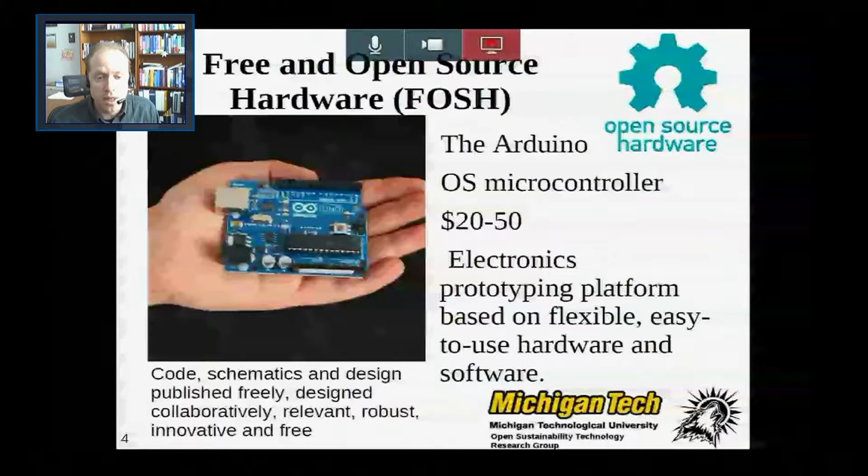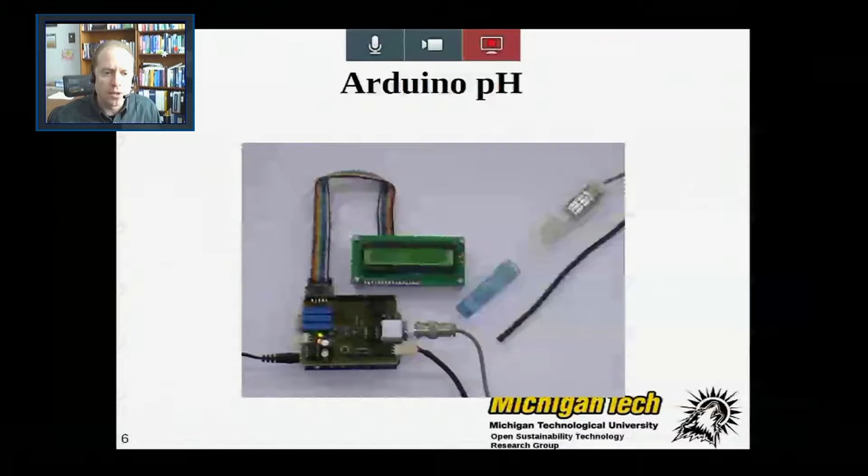Now, there's hundreds and hundreds of automation projects that have been developed using the open source Arduino. But of all of them, the one that's the most interesting, at least for me, is open source 3D printing, or the RepRap. So RepRap stands for Self-Replicating Rapid Prototyper. It is a 3D printer. It extrudes plastic filament by heating it up, going over a surface in 2 dimensions, just like a normal printer.

And by doing this, it can build up 3-dimensional objects. It can also build the components that make itself up. So the picture on the left is the first generation RepRap, and on the right is 2 of my students demonstrating its use with the One Laptop per Child computer developed by MIT.

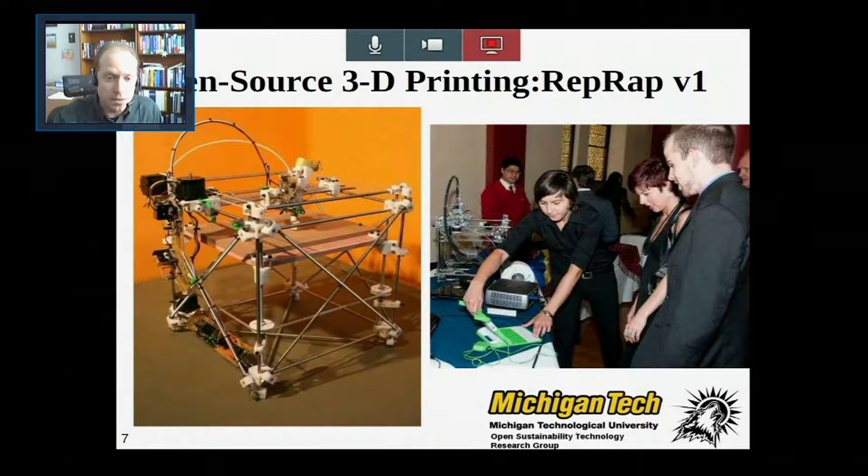Because the RepRap, these open source 3D printers, are open source, people from all over the world, including Brennan, one of my students here, are improving it. They're building on the design, making it better. This version 2 of the RepRap uses less parts, it's easier to put together, and costs less money.

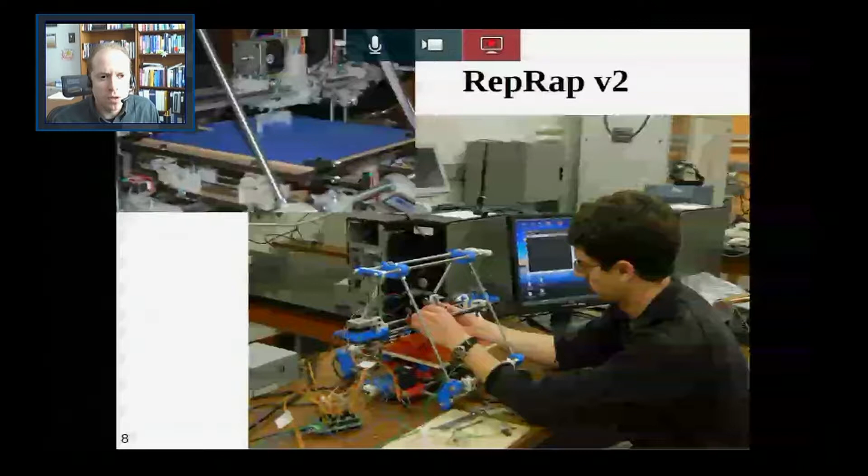Then here's version 3, and this gets to how you can start to use this open source approach to make very valuable scientific equipment. In this picture, you see an OpenSCAD model for an automated filter wheel. An automated filter wheel simply turns and puts a filter in the path of a light, and I use it for my solar photovoltaic research to test how solar cells do with different colors of light.

These filter systems are very expensive. The commercial ones are over $2,500, and the one that I had broke, so I needed a new one. But rather than go buy one, which was pretty expensive, we designed one using OpenSCAD, which is an open source CAD package that's freely available for everybody.

The computer it's running on is an old computer that was thrown out, but we revitalized it with a version of Linux, which is much faster. It's a much better operating system than, say, a Windows type machine. And then we used the 3D printer to print out our filter wheel.

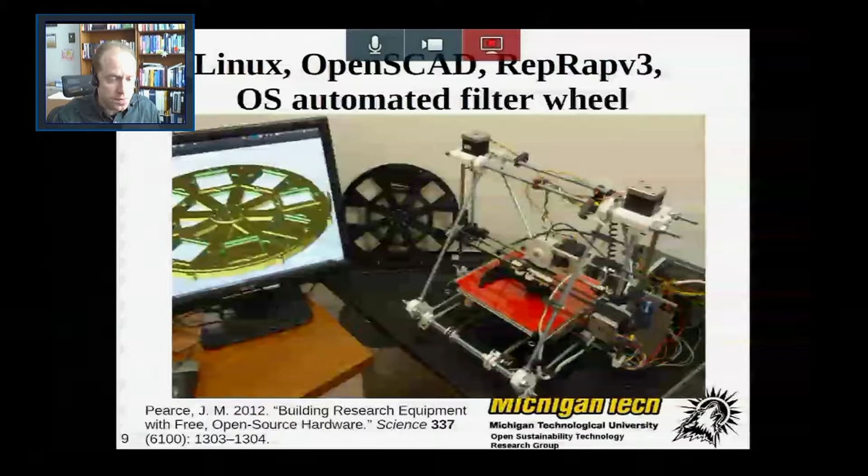So we were able to have an automated filter wheel that was exactly what I wanted for our lab, superior to anything on the market, for $50 instead of $2,500. And we continue to do better.

So now we've pushed the price of the RepRaps down to under $600. This particular version can be built in under 24 hours. If you have 2 people, it can be done in 5.

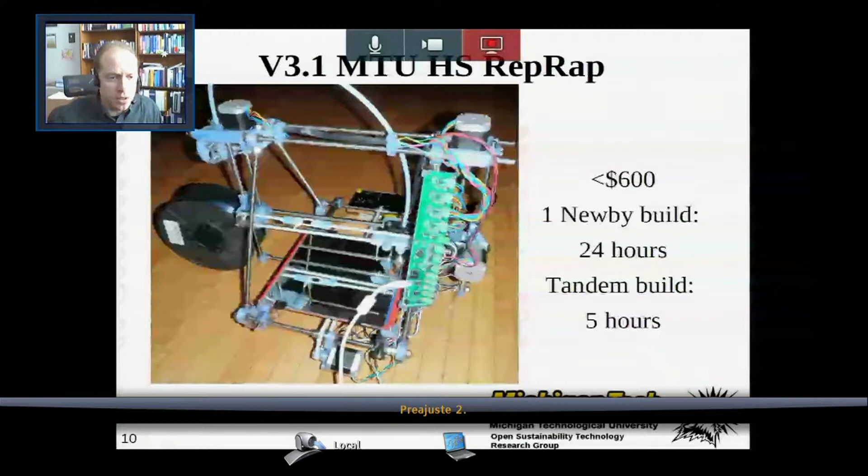Then you use this printer to develop very high-end scientific equipment. And when you do that, you can make an open source lab. So I want to go through some examples of how scientists can use this open source philosophy to drive down their research costs.

Because she shared her innovation with the world, she's repaid by the people that come after her developing her technology even better. So now she can download both the test tube rack and the centrifuge and print them for a fraction of what it would cost to buy them on the open market. It's in everyone's best interest to share as much as they can, because the more people that build on their design, the better it will be for scientists down the road.

And it goes for other applications. Oftentimes, one of the most expensive things a scientist does is prototyping. We were working on a polymer-based heat exchanger, and nobody even in the US could do it. We had to send away to Germany to have them do the laser welding prototyping for us, and this got very expensive. They were charging us $300 per item.

We wanted to test a bunch of them, and it was becoming prohibitively expensive. So what we did is we found an open source design for a laser cutter and adapted it for our own needs. If you look in the upper right-hand corner, all of the black components we designed and printed to meet our application exactly. We were able to create a polymer heat exchanger prototyping system, a laser welding system, for less than it would have cost to do 3 or 4 experiments overseas, and now we can make hundreds of them. This one device has saved my labs tens of thousands of dollars already.

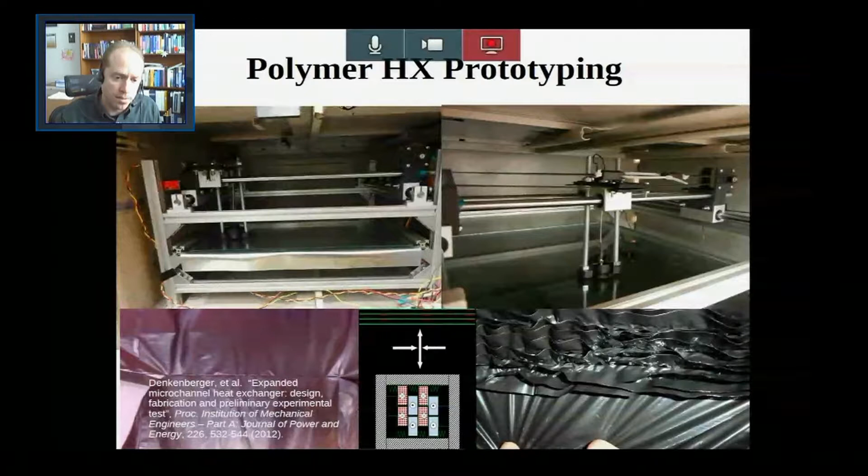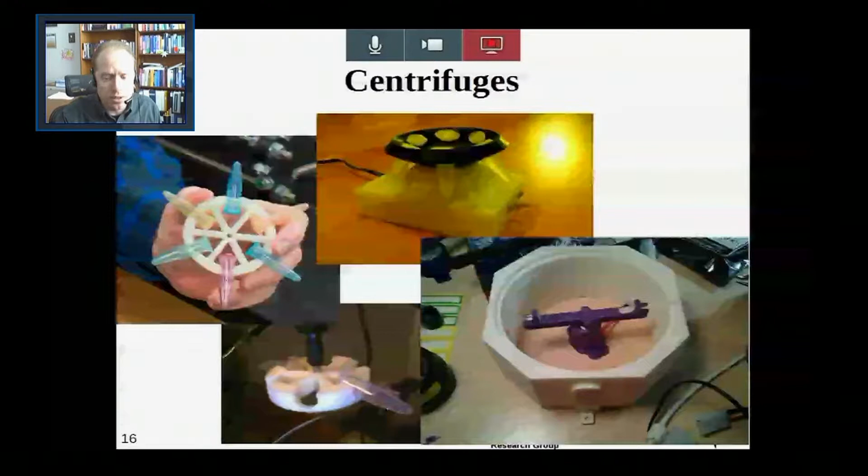I hope you're getting a feel for how you can get the same quality of technology and share it digitally so everybody can use the exact same device. It completely obliterates the normal cost of things like pipette racks and an auto pipetter - tools that are in almost every biology or biochemical lab - and you can print them yourself for pennies on the dollar.

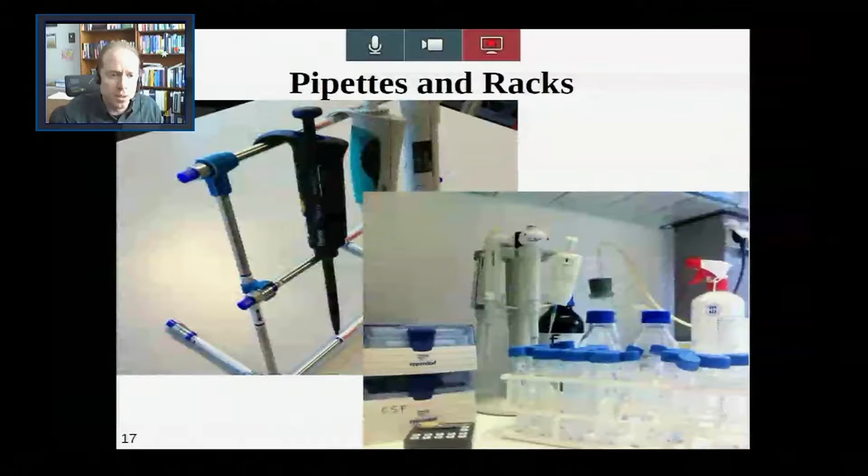It can make advanced equipment too. This is the open PCR for doing DNA replication, again less than 10% of the cost of a normal proprietary one. This is an open source colorimeter we developed in my lab, based on an Arduino Uno, so the total device cost under $25. It has a printed case, and as you can see in the lower right-hand corner, it's as good as a commercial one that costs over $2,000.

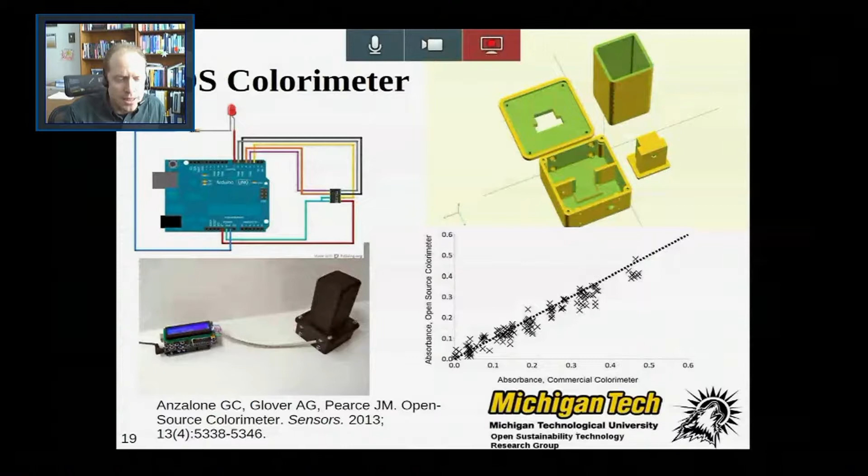Public Lab is a nonprofit group in the US that made a spectrometer that you can literally take anyone's cell phone and turn into a useful scientific instrument. For doing lab work in the field, for forestry rangers, biologists and ecologists, it's an invaluable tool, and it leverages equipment that everybody already owns - a smartphone.

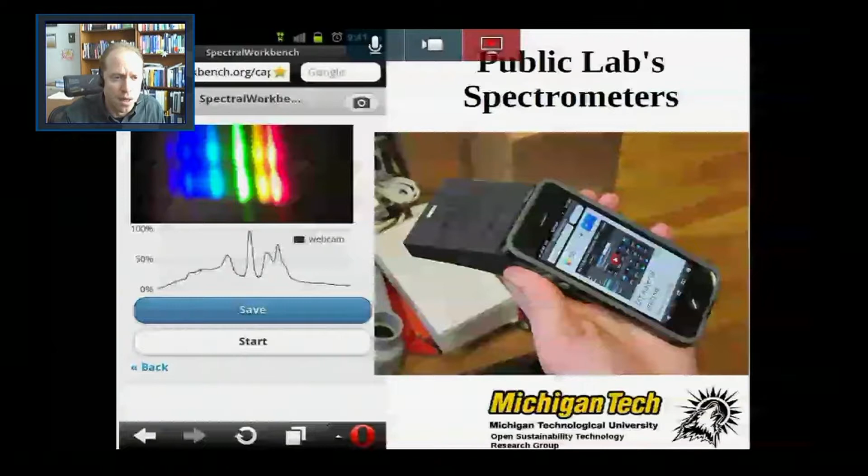This technology is evolving as people from all over the world contribute their ideas to make it better, competitive with high-end scientific equipment that would normally cost thousands of dollars. Sensorica is a group started in Canada doing a lot of this open source developmental work. The Mosquito is their design for an open source force displacement sensor, and this is starting to go up the ladder of technological sophistication - we're getting better and better. These aren't 3D printed yet, but I guarantee you, if they don't figure out how to make them 3D printable, my group will.

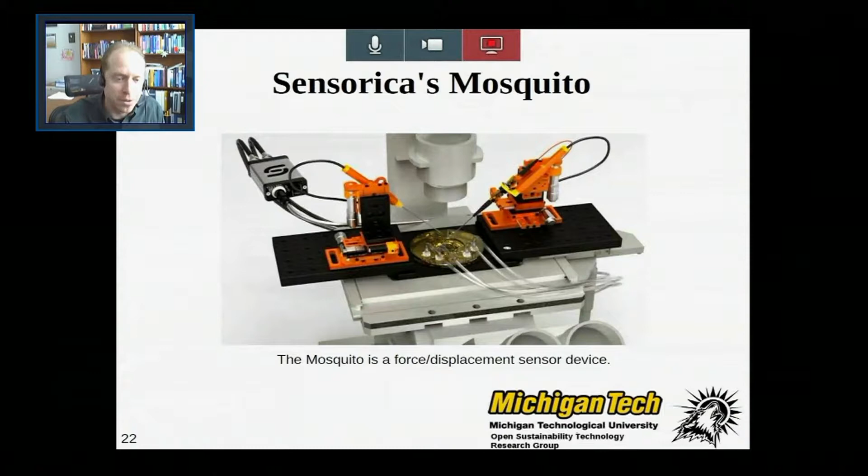A group at the University of British Columbia developed a digital microscope design where you use your cell phone as the camera, and the entire thing is printable. The lenses - they were able to pull those out of discardable cameras that tourists use. So you go to your local Walgreens or local tourist place, pick up used cameras, take out the lenses, and then you can make microscopes good enough to do preliminary scientific research - certainly good enough to teach students. As an educational resource providing extremely inexpensive microscopes, this is a great tool.

Or you can go on the high end. On the right-hand side, the University of Cambridge's Open Lab Tools initiative has made an $8,000 optical microscope.

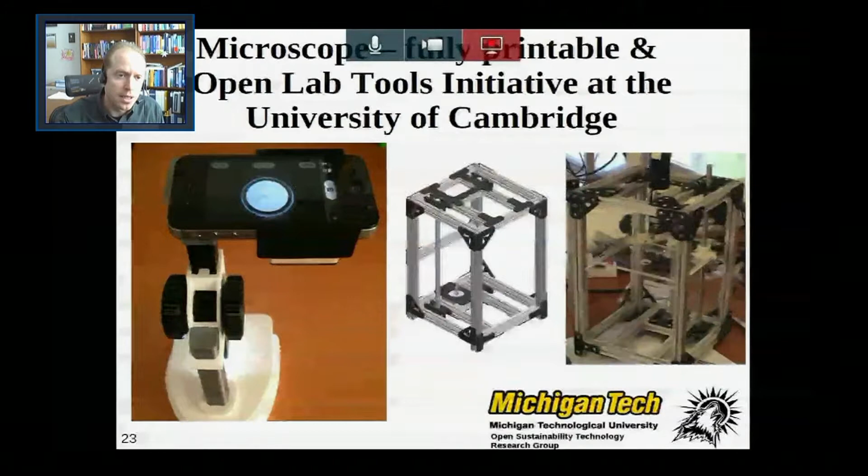It does self-zooming and all that. It would normally cost $80,000. Again, all of the plans are open source—download them and immediately begin to use it. They're kind of taking the next step in microscopy.

This GNOME system is an open source multi-channel imaging vector data acquisition and visualization system that allows you to do SPM techniques like scanning tunneling microscopy or atomic force microscopy. So this is moving to the nanoscale. This is top of the line, high-end scientific equipment that is free and available for everybody—the software is.

As we reduce the cost of scientific equipment, it doesn't just help our top national labs and top university labs, but it also makes it possible for citizens to start to think about being scientists. I really like this design, and it was partly influenced by the tragedy in Japan, where the Japanese public was not able to trust their own government or the authorities in industry to know what the radiation was coming from Fukushima.

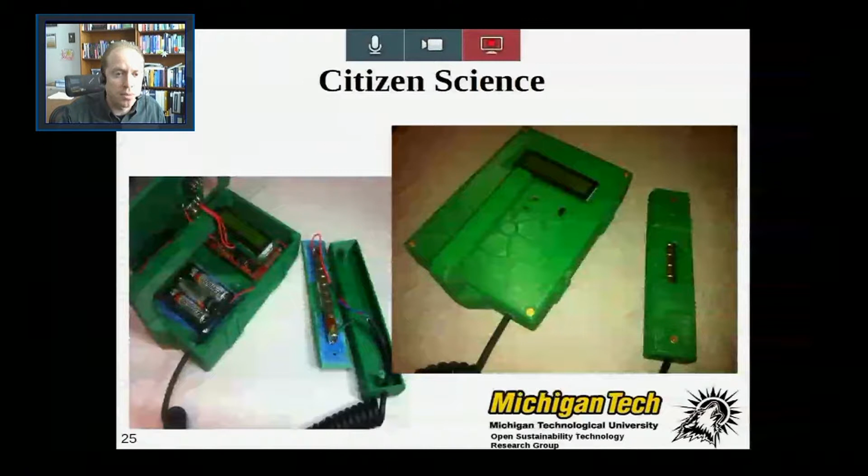So we can start to become more participatory in science, and this data is all very good and useful—real, professional scientists can use it as well. Now, this is the future.

As we get better and more sophisticated scientific equipment, we'll begin to put many functionalities together. For those of you familiar with Star Trek, they had a tricorder, a handheld device that could do basically everything a scientist could ever want. A university professor now in the US is developing a real tricorder.

This particular device has about 25 sensors in it. It's all open source, runs off of Debian Linux, and has a printable case. Everything about it makes it possible for the next generation to begin using it. Particularly for people that do field work, a device like this is going to become indispensable—and it costs pennies on the dollar compared to a proprietary commercial device.

Now, all the digital fabrication I've been talking about is based purely on low-end RepRaps—these sub-$500 3D printers that only print in plastic. That's sort of where the technology is right now, but we're quickly moving past that.

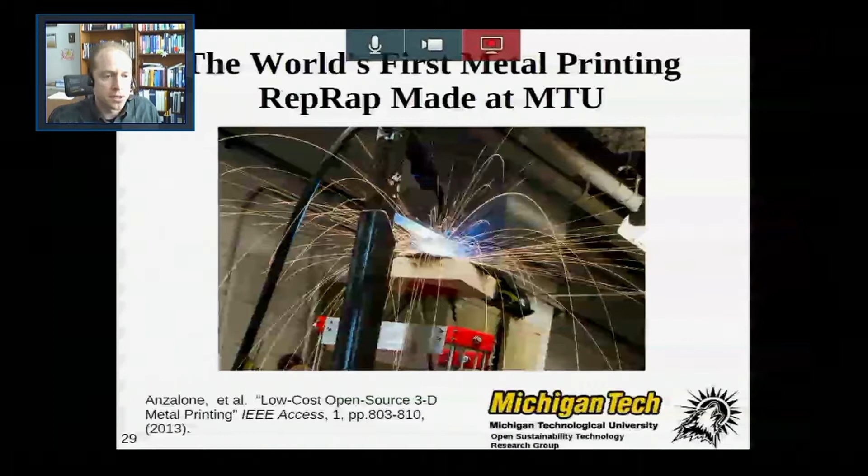Now, all the numbers I've been quoting on costs have been US dollars based on commercial filament. Commercial 3D printing filament costs between $35 and $50 US. You can take 20 milk jugs and make a kilogram of useful 3D printable plastic for 10 cents of electricity. And this is all just coming now. So we are going to be able to push the costs for the most sophisticated scientific equipment down into the basement where everybody can get a hold of it.

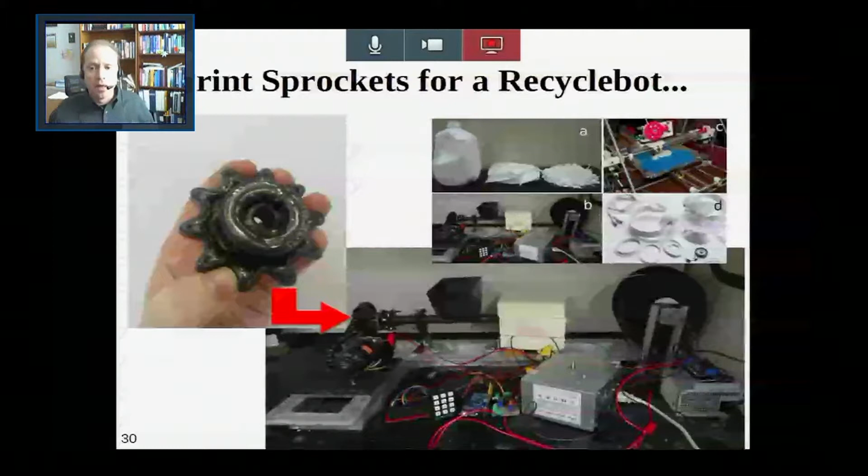Now, there's a lot of work happening on this front right now. There are many groups - basically every nation has already been doing some open source scientific work, but we can go much further. And to go much further, what we have to do is think about systematically making all the tools for scientists extremely inexpensive. So there are 5 policies that can implement that.

First, you form a task force with your best scientists, the cream of the crop, the ones that know what equipment is needed and are able to think about strategic national goals. So what scientific problems is Ecuador trying to tackle? And what equipment do you currently bring in from somewhere else in the world so that you're sending money away from your country rather than keeping it inside?

Then you look for high ROIs - ROI is return on investment. So if you can pay a scientist $20,000 to develop a tool that then makes it possible to save $2 million in scientific funding for other people to build that tool, that's your win. And so you tackle the free and open source scientific tools that have not already been designed.

The second thing is, after you figure out, say, the top 100 designs that need to be done that haven't been tackled yet, you use federal funding, scientific funding that would normally go to just purchasing equipment. Instead, use that funding to design the equipment. And then the person that won the grant not only gets the piece of equipment that he or she built for themselves, but they can then provide it on the web, and then everybody throughout the world, scientists that are able to.